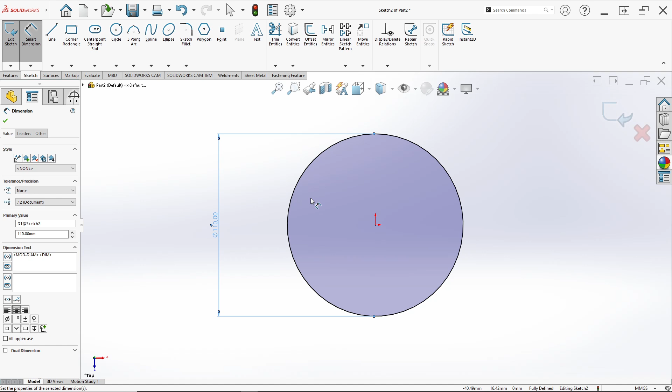The diameter is 110, and we give the thickness. Go to feature, extrude boss, just blind, and for the thickness is 35 millimeter. So we can change the depth to 35 millimeter and just click OK.

After that, we select this face, right click and click sketch again to make a cutting in here, cutting a hole in here for the depth. It has a diameter of 96.

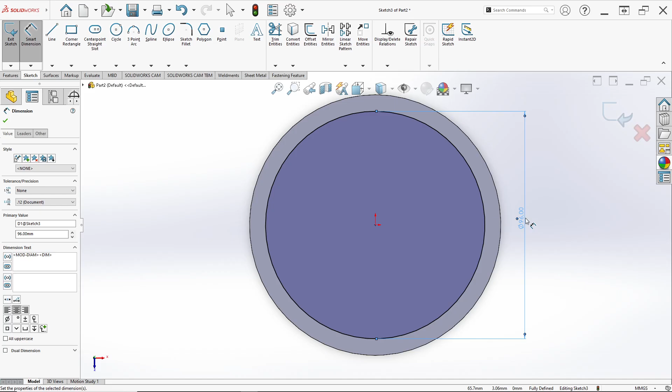Select the circle again, set dimension to 96, and go to feature, extrude cut. For the depth is 23, so in here is 23 millimeter. Just click OK, like this.

After that, we want to change the plane to the front plane. Right click and click sketch to make a cutting in here, and right plane to make a cutting in here. The width is 10 millimeter and the height is 10 millimeter for the rectangle hole, like this.

So we can select the corner rectangle and just draw it from this edge. Ensure this point, we can click Control on keyboard, and in this origin point or center point, make it vertical. So this corner rectangle is made vertical for this point or center point. Just set the dimension: the width is 10 millimeter and the height is 10 millimeter too.

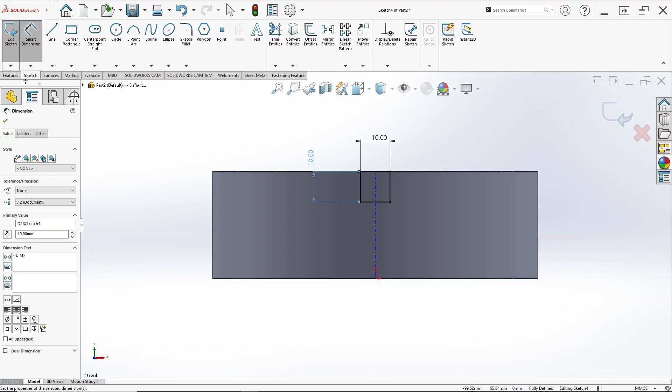After that, we go to feature again and extrude cut. We can see the extrude cut is two sides, in here and in here, so we can change the direction. The direction we can change to through all both, like this, and just click OK. It's simple.

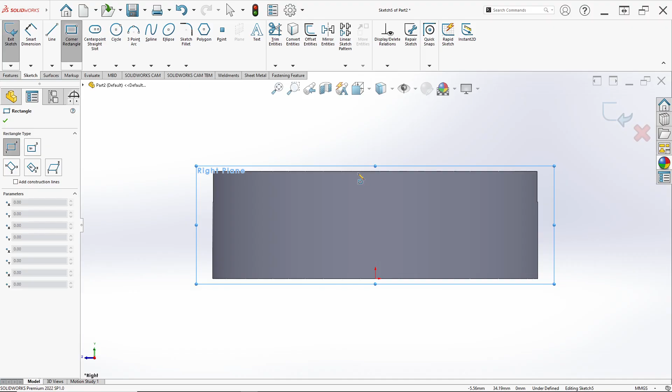So we can make another rectangle hole in here. Just click right plane and click sketch. Same, we make a corner rectangle again. Okay, ensure this point and this point, click Control on keyboard and make vertical again, and set the dimension. For width is 10 millimeter too, and the height is 10 millimeter.

Go to feature again and extrude cut to both, and select through all both to make a cut in two sides. So just click OK, like this.

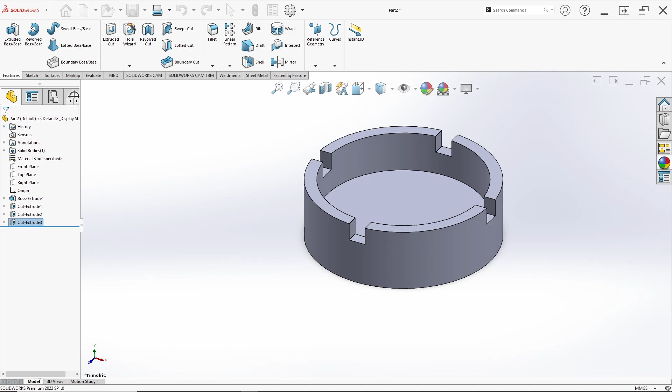After that, we want to make the hole in the center of the part in here. Just click this face and click sketch here. So we can select the circle again, draw it from this point. The dimension of the circle in the center is 32 millimeter. We can see the diameter here is 32 millimeter, so we input 32 millimeter for the diameter, like this.

And in here, around the center circle, there's a hole of circle, 1, 2, 3, three holes. The diameter is 22. We can go to circle, ensure the circle, the center is made vertical from this point in here.

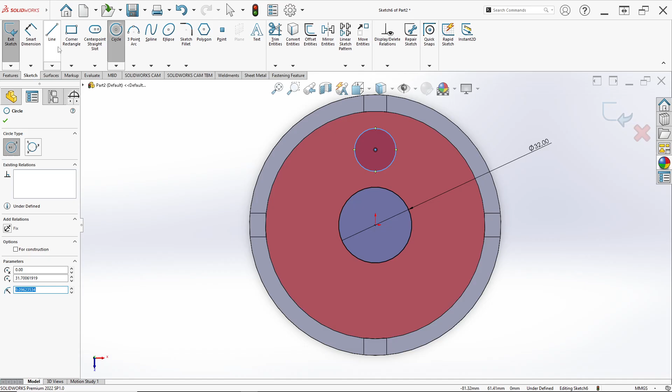Just draw it and click smart dimension. The circle diameter is 22 millimeter like this. And don't forget to set the dimension: the distance of the center circle to the smaller circle in here is 32. This point circle and this center circle distance is 32 millimeter, like this.

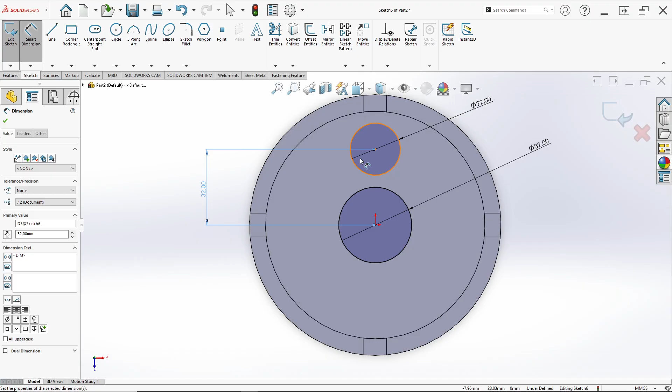After that, we want to make another hole in here. We use the feature circular sketch pattern. Okay, in this pattern, we select this circle edge, and for the point parameter we select this point, the center point.

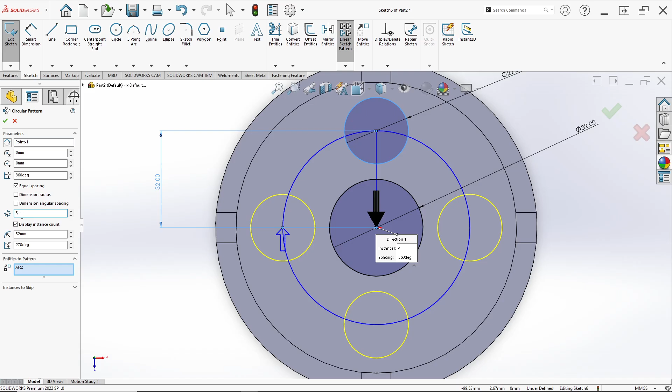But in here for the circle, we just need 3 circles. So you can change the number of circles here to be 3, like this, and just click OK, and it's okay. The circle is appropriate with the drawing.

It's symmetric and everything. And just click extrude cut. We can change the direction to through all, because the circle is made to hole through all in here. Just click OK. Okay, it is simple.

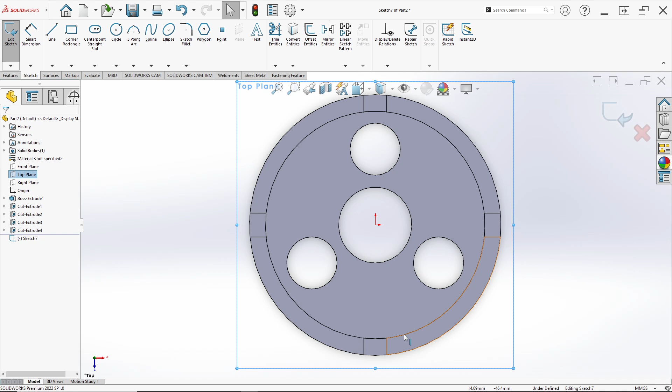So at the end, we again go back to this sketch. So we can go to the top plane again and click sketch. In here, we can draw a circle in here.

The distance between this circle, this hole, and the center of the hole is 68. So we set the dimension here to 68 like this, and set the dimension of the small circle on the hole. There is a diameter of 10 millimeters like this.

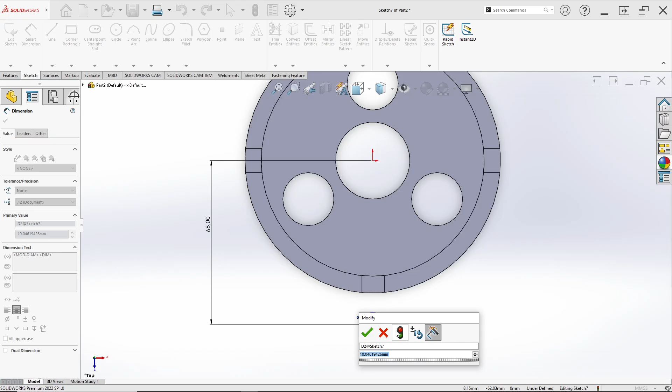After that, we make another circle here. The circle has a radius of 10, so the diameter is 20 millimeters, because the radius is 10 millimeters.

We can select the center line here, and then make a center line to mirror the part. You can trim edges here, we just need this part.

Okay, we make a line at an angle, 15 degrees. Just click line here, this end to this edge.

We can trim edges this again, to show this edge.

After that, we can set the dimension here, and this center line dimension, the angle is 15 degrees. You can see 15 degrees here.

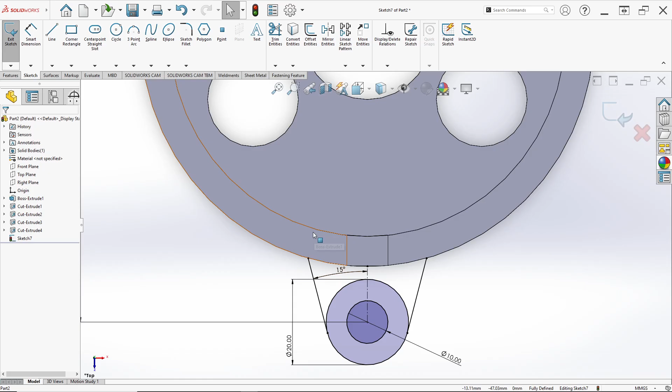After that we select convert entities, select this edge and this edge, and click OK. We can erase the line using trim entities, trimming this edge like this.

So we have the 2D appropriate with this drawing like this. We need 1, 2, 3 sketches like this.

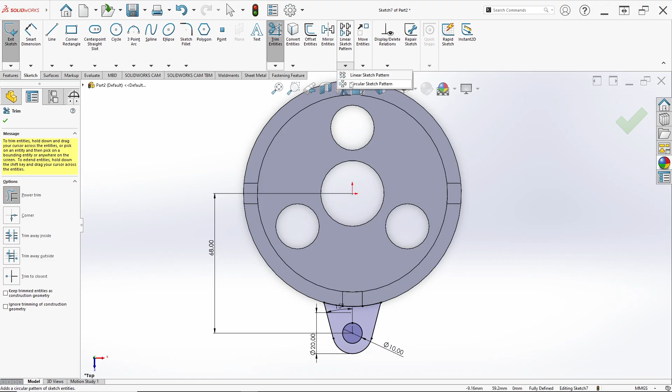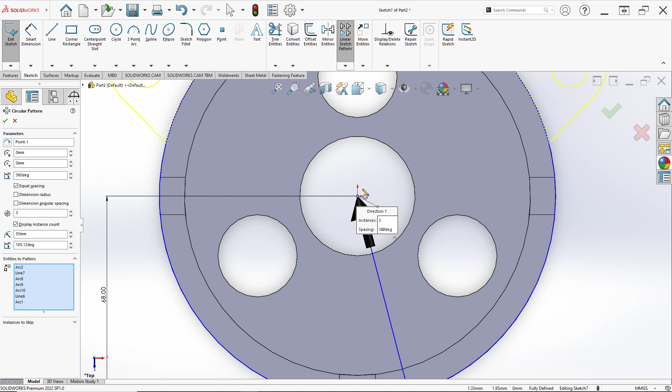So we just use circular pattern, select these two patterns, select this and select this circle. We just need 1, 2, 3 parts like this, 3 sketches like this, and ensure the point is at the center, this point in parameter point 1 like this, and just click OK.

Then we go to feature and extrude boss, giving a thickness. The thickness is 14 millimeters. In direction we can change to blind, and the depth or thickness is 14 millimeters, and just click OK.

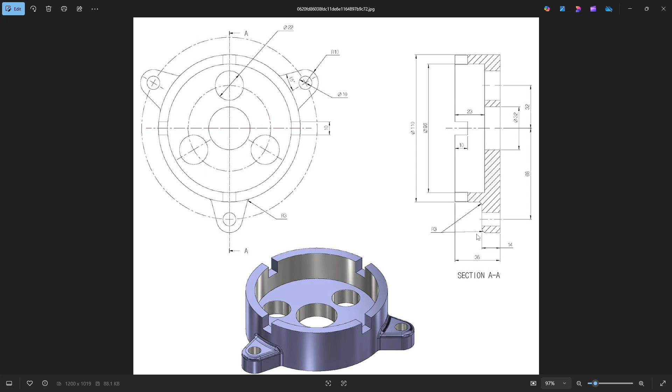Last, we give the fillet here. The fillet is R3, radius 3 millimeters. So go to the fillet.

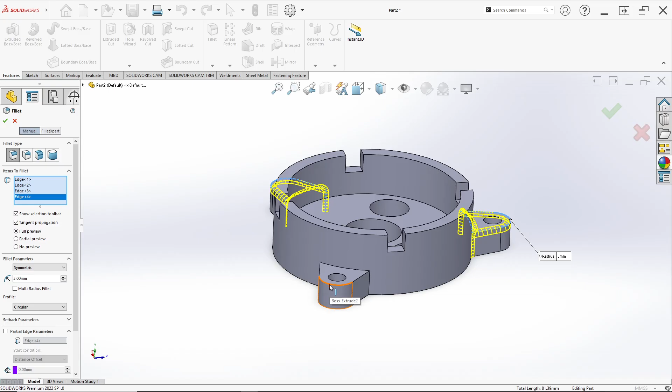For the fillet parameter we change it to 3 millimeters, and select for the fillet this edge and this edge, this edge and this edge, and the last is this edge and this edge. Just click OK like this.

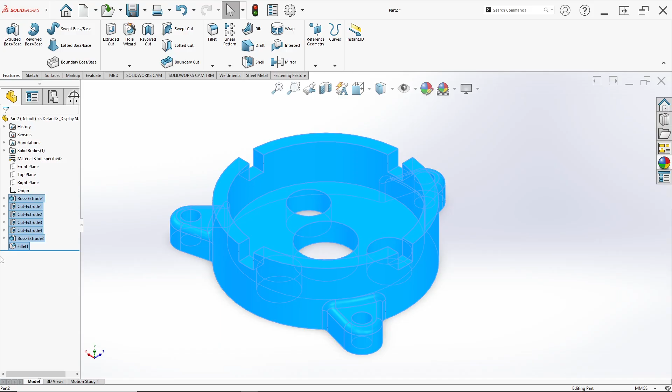It's a simple part. So we can change the appearances. Here we can change the appearances, select all the features. For example we make it metal, chrome, we can do a brushed chrome.

We can also change the color, for example like this, purple. Just click OK. So we can change the color of the cut like this.

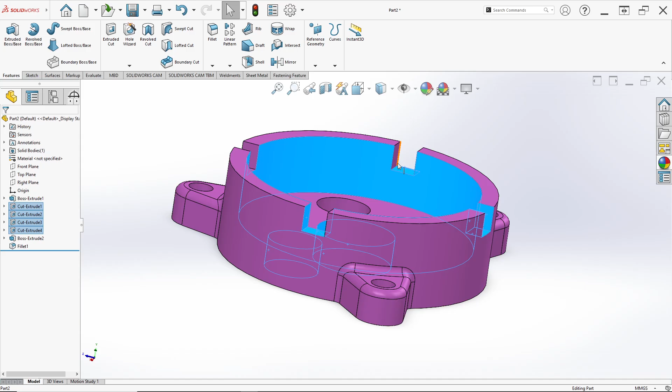For this face, click Control on your keyboard, and for this hole we make 2 different appearances to make it more interesting. Just this face, click appearances again. I think I want to make it chromium plate like this, and done.

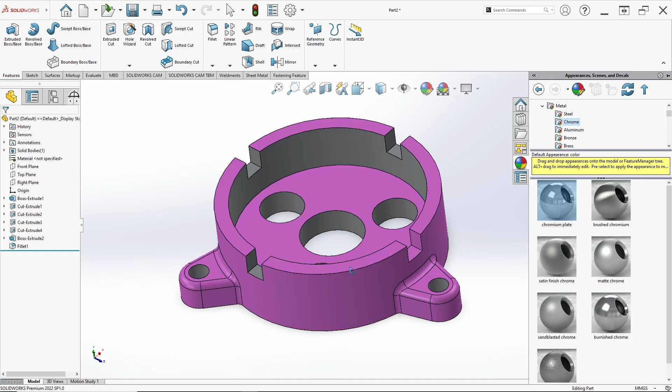It's a simple part to exercise or practice our SolidWorks like this, like this, and done.

Okay, it's a simple part of a motor and cover. I hope this tutorial helped you to practice and learn SolidWorks.